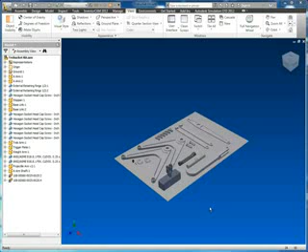What you see on the screen is my trusty trebuchet, which if you've seen some of my other demos is one of the models I use pretty consistently because it's simple, does a lot of things, and is fun to play with. As part of the demos and workshops I do with students around the country, I've got the assembly all set up where it's assembled, and another version laid out as a kit of parts. I also have one where the assembly is partly built, so depending on my time, I can adjust how long it'll take to finish this model.

So what we're going to go through today is considered a bottom-up approach to assembly modeling. The other option would be top-down. Bottom-up means essentially that you've built all the parts, and now you've got them complete and you're going to put them all together in an assembly. To be honest, typically I don't start this way unless I'm really trying to explain things to people.

I normally work with a top-down approach, where I build an assembly. I might build one or two parts on their own and then put them in the assembly and use them as the foundation. For example, in this model, I would have built this ground plane because it is the base that everything attaches to. From there, I would build parts in context of the assembly rather than building them separately and adding them in. But I'll show you how to do both a little bit, I'll touch on each of those, though I'm not going to go too deep into top-down modeling.

Anyway, to get started, what is assembly modeling? Assembly modeling is essentially putting together your assembly. What that means is, if you go to the View tab in Inventor, under the Visibility panel, there's a Degrees of Freedom button. That lets you see, or turns on the visibility of, the degrees of freedom. Every part has 6 degrees of freedom: an X, Y, and Z translation, and an X, Y, and Z rotation. In order to properly, fully constrain a 3D model, you have to provide 3 constraints to lock it into place.

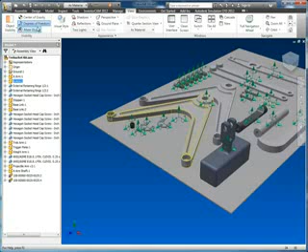So I'm going to start with this piece here, which is one of the A-arm components, and I'm going to turn off the degrees of freedom. You can toggle it on and off. I'll be toggling it back and forth throughout the demonstration until everybody gets a feel for what it's doing, and then I'll stop using it.

If you go back to the Assemble tab in Inventor, in the Position panel, there are 2 things that are important when you're talking about assembly constraints: the constraint dialog box, and the assemble command. I typically teach students to start with the constraint dialog. It's considered the old-fashioned way, it's been in Inventor forever. It was the way you did assembly constraints up until around 2011 or 2012. I can't remember exactly when they added the assemble command, but within the last couple of releases they added it, and I'll touch on that in a bit.

The reason I have people start with the place constraint dialog box is it's good information. It shows the icons, you can hover over them and see that this is the mate, hover over this and see that it's angle. It's important to understand what these icons look like, what they mean and represent, and understand the solution options before you start using the assemble command. The assemble command is more for somebody with a bit more experience, but once you get that experience using the constraint dialog, the assemble command is really nice.

It speeds things up and makes it a lot easier to assemble things. So anyway, back to getting started.

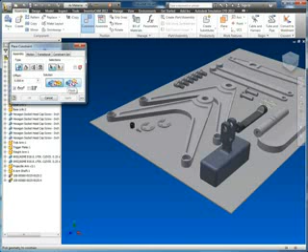In Inventor we don't technically have a separate mate and flush constraint. I mean, technically we do, but essentially they're just opposites of each other. A mate puts two faces together, and a flush aligns two faces in a flat orientation. I'll show you this in a second as we do it.

Let's go ahead and start out. I'm going to zoom in so I can easily select this face. What I'm going to do is select this face, then zoom out and select the side of this plate. Actually, I'm going to turn on my edges to make it a little more clear. There we go.

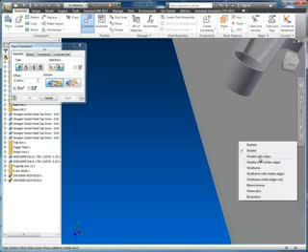Here you can see what I did: I selected two faces, and in the dialog box these little glasses are a preview, so it'll show you what's going to happen. You can see I've got OK, Cancel, and Apply All available. If I hit cancel, the part flips back into its original position and everything's canceled, or I can apply it and move on to start adding new constraints.

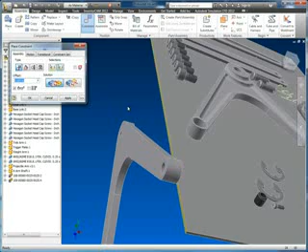Before I move forward, let me explain what happened. I selected the two faces, this face here and the side of the ground plane, and mated them. That's what this solution is - if you hover over it, it says mate. The other option is flush, which essentially flips that over. It's just a matter of flipping the answer, so they're very similar constraints, and that's why we only have one called mate, with solutions of mate or flush.

So what I did is a flush, and I'm using this as a temporary kind of constraint just to start getting this main piece put onto this plate the way I want it. Then I'm going to ground it and build from there - I'll explain as I go along. So I'm going to go ahead and hit apply.

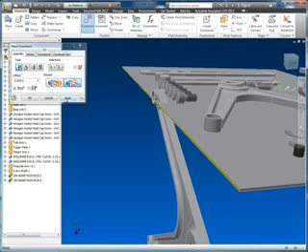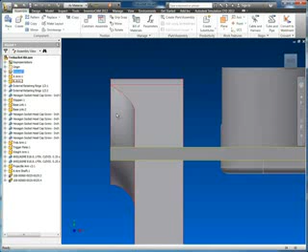Actually, I'm going to hit cancel so I can show you what just happened. If I go to a front view, let me get out of perspective view so you can see what that looks like. You can see here that these two faces are now aligned. If I zoom in, here's the ground plane and here's the A arm, and you can see they're flush on that face.

The way to test it is I can click and drag any part in Inventor to see what degrees of freedom it has remaining. If you'll notice, if I drag up and down, it slides. If I drag right and left, it does not move. It still moves up and down just because my cursor is moving, but it maintains that flush relationship.

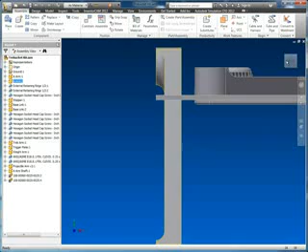Now that I've got that in place, let's rotate around here. Next, I'm going to move this up a little bit. So I'm just showing you that even though I'm moving it around, it's still aligned flush to that edge.

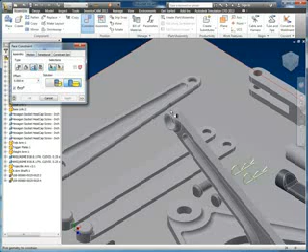Now what I'm going to do is bring my constraint dialog back up, and I'm going to use this tangent option. This is an option you probably won't use very often, but it just so happens I need it in this case. I'm going to select a circular edge and then the top of that flat plate. I'm going to zoom out, and you'll see here that it has made that tangent to the edge.

Again, this has another option where you can flip inside or outside of the surface. This is common across most of these tools, so you might have a couple different solution options. It doesn't hurt to switch back and forth between these just to get a feel for how things work.

I'm going to hit OK, and now I'll show you what I did. See, now it's maintaining that tangent if I click and drag, so I can rotate this up to be something like this. Of course, this edge, this face, is going to be tangent to the top of the plate. So that's what we're going to do next.

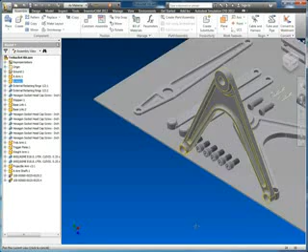But now what you can see is if you look at it from the left, even if I'm dragging this and trying to move it up, it locks that into position, and it's kind of floating in space. But that's what we want it to do.

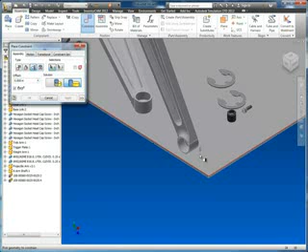So I'm going to go back to my isometric view and add that final constraint here. I'll bring my constraint back up, go to my tangent option, and select the circular face and the top of the plate.

And so now I can slide this back and forth. I can't lift it off the plate because it's maintaining those tangent constraints. And because we have the flush constraint, it's lined up with the side of the model.

What I'm going to do now is I don't really want this part right up against the edge. The only reason I put it there was just to explain things and as a temporary orientation for this.

What you'll notice is if I select this part, it highlights in the browser. Here's my A-arm in the browser. Now this is a simple model, so I only have maybe 20 parts or so. But if you've got 100,000 parts or 50,000 parts in an assembly, this arm may end up dropping off the bottom of the screen and you might not be able to find it.

If that happens, you can always right-click on a part and say Find in Browser. Let me pick this projectile just so something else is selected. If I hover over it, it highlights, but if I right-click and select Find in Browser, I have to select it first. There we go - hit Find in Browser and it will find it. It's a bad example because of the size of this assembly, but the key is it'll scroll the browser to that location and highlight the part for you.

You can also do it in reverse. If you don't know where the part is in the assembly but you need to find it, you can right-click and say Find in Window, and it will highlight the part and zoom in on it in the window. It's just a tip that comes in very handy when you're working with larger assemblies.

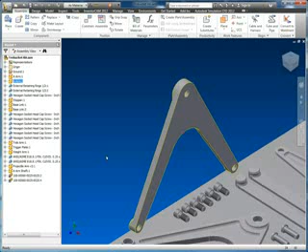So next, what I'm going to do is suppress this flush constraint because I don't really need it - I just needed it temporarily to align things. I could delete it, but just in case I want to turn it back on, you have the ability to suppress it. You'll notice it grays out in the browser, meaning this constraint is turned off.

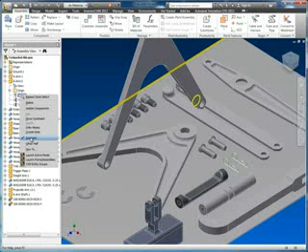So I can now move this model out into the center of this part, where I think I'm going to want to build from. If I ever want to go back and put that back on, I can right-click on that constraint and hit unsuppress, and you'll notice it snaps back into place. So it's just turning the constraints on and off.

Now that I have this part in position to start building the rest of the model, I'm going to ground it. I select the part, right click, and select Grounded. You'll notice a pin icon next to the part in the browser, and if you click and drag, you get a pin icon indicating it won't move. Just like any part, you can unground it again, so from time to time you'll ground and unground things to help with the assembly process.

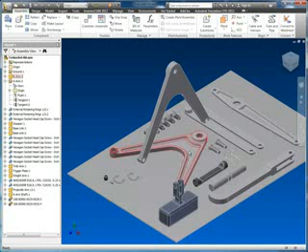Next, I want to do a couple things to prep for later. I'm going to delete this part. Let me select it properly... there we go. And I'm going to delete a few of these screws, just so I can show you something in a little bit here as we go along.

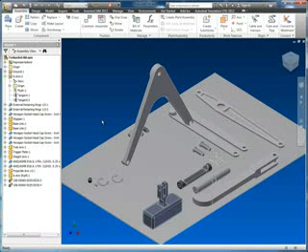Right now you're seeing all these parts already in the assembly. In a typical environment where you're not starting with all the parts in a file already, you would use the Place button in the upper left-hand corner to select a file from your hard drive.

And you know what, let me see, this is the weight arm, I'm going to go ahead and delete that as well. I'll go back and show you how to place parts in a few different ways as we move along. But first, just to clean things up and get started, let's look at putting this shaft into position up here.

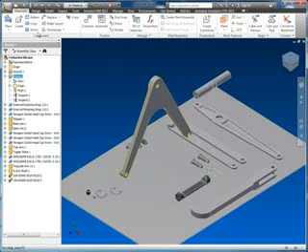This part is still grounded, so I'm going to bring up my constraint dialog box. I'm already on the Mate command, so I'll select the bottom face, or the face on the end, of this part and the face of that part, and I want them mated rather than flush. I hit Apply, and you'll see it locks that thing into position. Now I can click and drag, but it maintains that mate constraint, keeping it in position.

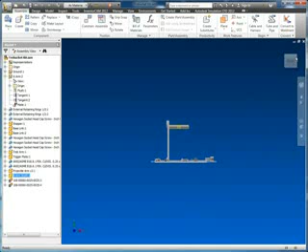Essentially, all we're doing is working through a process of removing degrees of freedom. Remember, on the View tab there's a Degrees of Freedom option, and you'll notice this part no longer has the ability to move in one direction, it lost an arrow. I think it's the X direction, yeah, in the X direction it no longer has an arrow.

As I go back to Assemble and add a constraint, you'll see these change as we go. So I'm going to do Mate again, but instead of a face, I'm going to select the axis. If I hover over this, it picks up the axis by default. If I hold my cursor in one place, I get the Select Other dialog, which gives me the option to select the axis or the face.

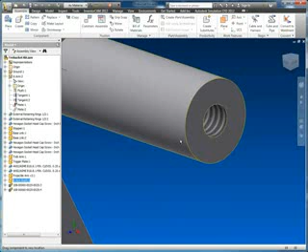This will come in handy, I'll show it more a little later. If you don't want to wait for it, you can right click and choose Select Other to bring that dialog up immediately. I'm going to select the axis because I want to align that axis with the axis in this hole. By doing that, I lock it into position, and you'll notice the degrees of freedom change. Now the only thing it can do is rotate, which is hard to see, but if I rotate it you can see the threads in that hole spinning a little. Essentially it's locked into place on the axis and on this face, so it can spin, and I'll just leave it like that for now since it doesn't really matter in this case. But I'm going to turn off those degrees of freedom again.

Next, we need to put another arm on this side of the model. I deleted the one that was in this assembly because I wanted to show you that it's essentially just the same part flipped over on the other side. Once you have parts in the assembly, I select this part, and here it is in the browser. Rather than going back to the Place button and browsing to my hard drive to select that part, I can actually drag and drop it right from the browser.

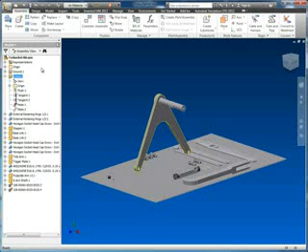If I left click and drag, you'll see I get the little place symbol. When I release, it puts a copy of that into the assembly, and you can see that down here. Now ARM 3 is down here on the bottom. You can reorder things if you need to, just to keep your similar parts in proper orientation with each other in the browser.

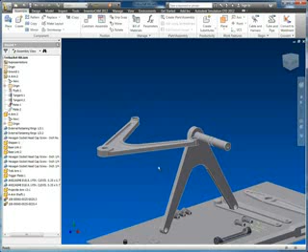Now I'm ready to start adding constraints to that part, so I'm going to bring up my constraint dialog box. I'm going to use select other. What select other does, and I'll explain more as we go, is it takes an arrow and shoots it straight through the part.

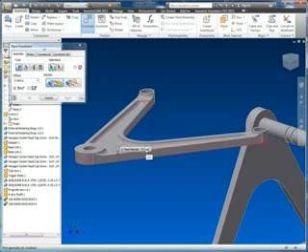So here I'm selecting the top face. The only other face I could select, going straight through the part to the back of the screen, would be the back face. So if I right click and hit select other - whoops, I'm in a bad place, there we go - it automatically picks the bottom face for me without having to rotate. That'll come in more handy with some of these other parts, but it means you don't have to rotate the model all over to get to a face you can't see.

Next, I'm going to select the side face of this part, hit apply, and now my part snaps into place. Again, I can test by clicking and dragging just to make sure it's working and reacting the way you'd expect.

As you get the hang of constraints, next I'm going to do a mate. I'm going to select the axis for that hole and the axis for this hole, and apply it. Then I'm going to select the axis of this hole and the axis of this hole, and apply it.

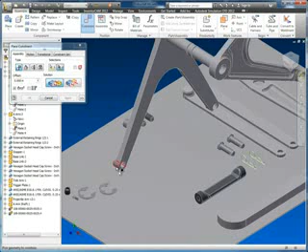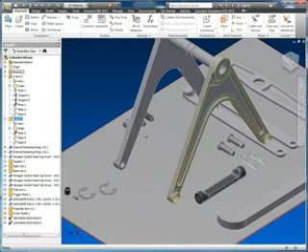Now what I've done is locked this into place, and when I click and drag, you'll notice I get a no-go symbol, like no movement - different from the grounded one. Over here, if I click this and ground it, I get the pin with the ground symbol. This one is locked into place and cannot move because it's specifically grounded and pinned into place. This one, the no-go symbol, shows that it's not grounded, but it has enough constraints that it's positioned 100% and can't move without other parts moving with it or causing it to move. So really this is just a process of rinse and repeat now.

Let's get down here to put these pieces on. These are the braces that run between these two holes on the inside, and it has a little boss on the end so these screws can screw into it a little easier.

So here's a good example of when you can use select other. I want to get to the bottom face of this, not the top face, but its opposite underneath this part. But I don't want to move it or rotate it - this is where you could use select other.

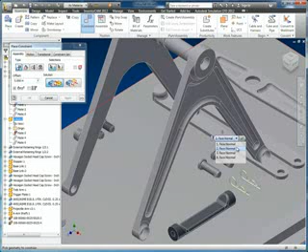So I'm going to right click and hit select other. First you want to make sure you hover over the face that you think you can get to the bottom face through, and let it bring up the dialog box. Now if I click the drop down, you'll see there are 4 faces I could pick: the top of this face, the top of the ground, the bottom of this face, and the bottom of the ground. You'll notice it highlights that face up here, though it's a little hard to see - let me reposition this so you can see it more clearly.

Select other - so I've got the bottom face there: top face of this part, bottom face, top face of the ground plane, bottom face of the ground plane. So without rotating, I can get to any of those 4 locations.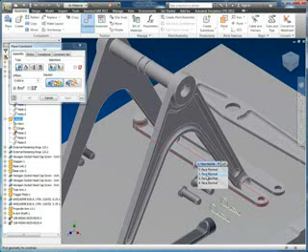So I'm going to pick the bottom of this part, and then link it up to the face on this part. When I do that, it snaps into position, and I can cancel and drag it around. So it's essentially doing what we've already been doing—we're just rinsing and repeating the process.

Next, this is something common across all of Inventor. If you right-click, the top of the right-click menu shows the last command you used, or you can just hit enter on your keyboard to bring up the last command. This comes in handy when you're using constraints because you keep going into this dialog box. But once we get into the assemble command, it'll be a lot different—you won't need the dialog box anymore.

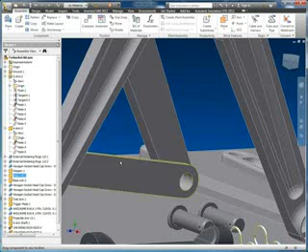So I'm going to select that axis and the axis of the hole I want it aligned with. Now, if I click and drag, you'll notice I can rotate this—just another way to test and make sure things are working as expected. I'm going to hit enter on my keyboard to bring the last command up, select this axis and the axis for this hole, and apply that. It locks into place.

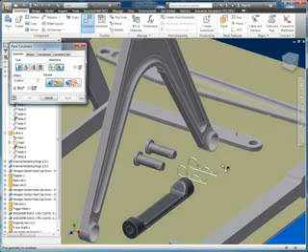Now, without even getting out of the dialog box, I'm going to start the same process again. Select other—I'm going to get the bottom face. I'll lock that face there and hit apply. Oh, I must have picked the wrong face. I think I picked the top face of the ground plane, which is grounded.

So that's actually not a bad thing. Let me go back and show you what just happened, because the last thing I want everybody to think is that errors are bad. They aren't—that was just a warning telling me I tried to do something the system couldn't do. If I try to take this top face of the ground plane and mate it to this part here, I'm going to get that error.

What it says is I can either edit the constraint and pick something different through the selection options, or I could cancel this. I could say, whoops, I know this was grounded—maybe I grounded it temporarily and didn't mean to, and I know that's what's causing the problem. I could just accept that constraint, put it on in a failed fashion, then go unground this plane, and it would snap into position like you put on a proper constraint.

And there's also a diagnose process you can go through to suppress constraints and walk through a process to try to fix it. But in most cases, once you get the hang of it, you'll know what's going on.

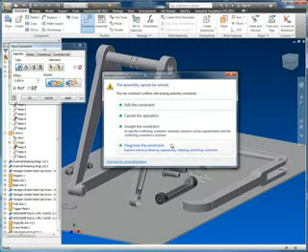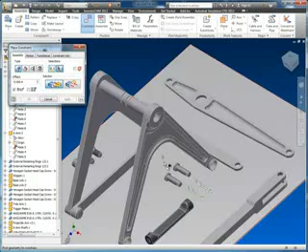So I'm going to go back and continue where I was. I'll select the bottom of that face and the back of this face, and apply that constraint. Then I'll zoom in a bit and get that axis and the axis of this hole, and apply that. Let me zoom out a bit.

You can see it's hanging down underneath, so I'm going to cancel this. You can click and drag and it rotates into place—though you don't have to do that. I'm just doing it for visibility purposes so you can see what's going on. So I'm going to hit enter on my keyboard and bring the constraint dialog box back up.

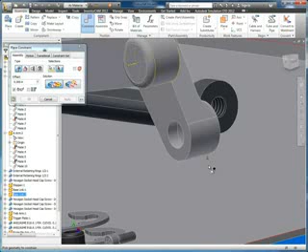I'm going to do that axis, and the axis to this hole. Now I'll go back and reselect the second selection. I could pick the center of this hole or the outer face - it's up to you. If you know this hole is always going to be concentric with this face, it doesn't matter which one you pick; it's a matter of preference. To be 100% safe, pick the center of the holes, since that's what you want lined up. But again, it's a matter of design intent. So I'm going to select the center of that hole and hit OK.

And now I have those parts locked into place. Let me zoom out a bit and reset everything back to where I was. Okay, so now I've got everything in position - the frame is starting to come together. Everything's locking into position because this is grounded and everything's constrained to it.

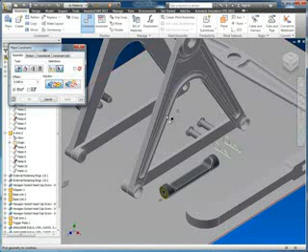Next, let's go ahead and put in this piece here. It works pretty much the same way with one slight difference. I'm going to select that face and apply. Now I'm going to select that axis and the axis for this hole and apply. The one thing you'll see here is this does rotate - so it does have a degree of freedom remaining.

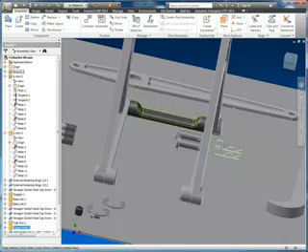Now it may or may not make sense to put a constraint on there to prevent that from rotating. I know when I assemble this, the pressure from these screws holding it together and the way this assembles means it's not going to rotate like this. So I'm going to add one more constraint to remove its final degree of freedom, and that's going to be an angle constraint. We haven't done this one yet, so I'll show it to you.

I'm going to select the angle constraint. It's pretty simple - I select the top face there and any other face I want it aligned with, and I want those to be in the same orientation with 0 degrees of angle between the two. I'll select the directed angle option, and I'm not going to get into these other options now - they get a little more advanced as you need them. Just remember, there are alternate solutions for all constraints, so if something's not working exactly right, look at these other solutions. The help file explains these, but I won't get into them now.

So let me show you here - if I hit 0 and hit apply, it's going to lock that into place. So this face and this face have 0 degrees of angle between them - they're parallel to each other.

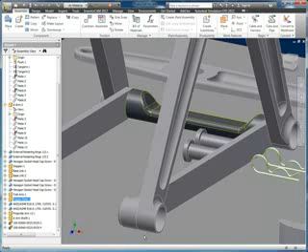Now if I select this and say find in browser, there it is - the trigger plate. What you'll notice is that as I've been adding these constraints, it's been adding them underneath each of the parts. This has another face - this is the face on the trigger plate. And you can also see when I highlighted this, it's showing me the other face that's involved.

But I don't know exactly what part that is - I can hover over it and see it's the base link. But I could also right click on it and say find other half - here it is, called other half. It will jump to that part, expand it, and highlight the other half of that constraint. This comes in handy for finding constraints and troubleshooting if things aren't assembling properly and you have to figure out what's going on.

The other thing you'll notice is this angle. The reason I wanted to show you more about the angle is it shows you the degrees in the dialog box. If I right click on this and hit edit, you'll see this degree. If I type 45 and hit OK, now you'll notice this face and this face are 45 degrees apart - it's just controlling the angle.

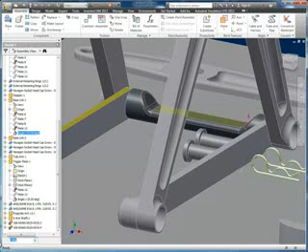The same goes for mates in any of our other constraints. I'll show you that in a better example in a little bit. But one shortcut: if I select this angle, you'll notice down at the bottom of the browser there's a quick input area where I can say, well, let's see what 70 degrees looks like. When I change it, you'll notice it changes to 70 degrees. So I'm going to set that back to 0 by typing 0 and hitting enter on the keyboard. It resets it.

That actually controls drive constraints, which I'm not going to get into here. But since we're in assemblies and I've got a couple parts that are easy to work with, I'm going to do a quick side tangent on drive constraints because it's important to know, and it comes in very handy for showing motion and examples to people who need to see your models.

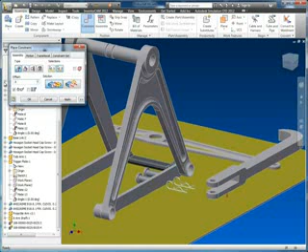I'm going to really quickly set up a drive constraint, and it's nothing special. It's just a constraint, and you're changing the distance of the offset in an animated fashion. For example, I'll take this part, bring up my constraint, and make the face of this arm mate to the top of the ground plane, then apply it. Notice there's 0 offset. If I set this to 1 inch, you can see it changes. Here's 0.5, and then let's go back to 0. So all I'm doing is creating a mate constraint.

Now let me find that in the browser. I have the projectile arm, and here's my mate. On any constraint that has an offset like that, you can right click on it and select to drive that constraint. Let me bring the dialog box in here. So this is going to say start at 0 inches, which is where it's at now. This constraint is 0 inches off. It has no offset at all.

And then I'm going to say make it, let's do 3 inches. I'm going to do between 0 offset and 3 inches of offset with no delay. This little double arrow is just more options you can run. One option is just go from the start position to the end position, that's it. The other option under repetitions is start, end, start - so go from start to end and back to start once. In this case, I'm going to do it 3 times. The other options here are the amount of steps, so if you did it in 1 inch increments for 3 inches, this would make 3 steps to get there.

I'm actually going to do it in, let's do 0.1 inch steps. You could also choose to do it in the number of steps, say 30 steps, and you'll have to play with these just to see. But I'm going to go back to 0.1 and just hit play, and all it's doing is changing that offset value for me. Actually, you know what, I'm going to go to 0.05 instead and play that again. So by doing smaller increments, it does slower motion.

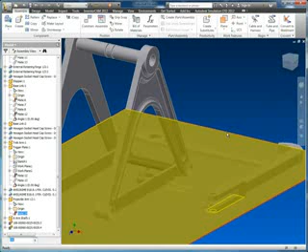So if I hit OK here, well, let me go a little bit... there. Okay, so what I did is I stopped it at about 1.6 inches - exactly 1.6 inches. If I hit OK, it put the offset value in for 1.6, just like I went and typed it here. So it's just a way you could do some testing, find a value that worked, and apply it quickly to your model. Or if you decide you don't want it anymore, you just go back and hit 0, and you're back to where you started with no harm, no foul.

So I'm going to go ahead and delete that constraint. Sorry for the little side run there and the tangent I got off on drive constraints, but they come in very handy. Actually, you know what, let me undo that.

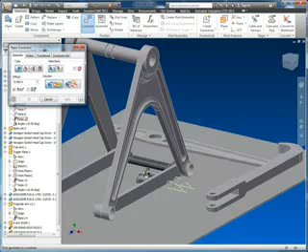The other important thing to remember here is that if other parts are constrained to that arm, so for example, let me pick the top face of this bolt or this clevis pin. If I were to mate this to the arm here and apply that, now if I do the drive constraint, it keeps those constraints, right?

I'm going to drive this mate again, and both parts move. So it does maintain these relationships between those parts, even if you're driving constraints, which makes it so that you can do all kinds of motion testing and things like that. So anyway, I'm going to undo, put those parts all back to where they were, and we'll continue with our example.

Next, what I want to do is put this arm here into the center here. Now, there's a couple of things that are going to happen here, so that we can talk about. I'm going to select this part in the browser or in the graphics window, and it highlights in the browser. If I expand this, you've got to remember back to the part modeling examples.

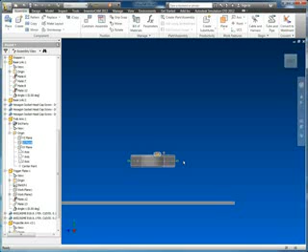Every part has X, Y, and Z planes and axes. When I created this part, I used a symmetric extrude, so I know that the XZ plane here runs right through the middle of this part. And if I zoom in, you can see it extruded a 1/4 inch, or an 1/8 inch in one direction and 1/8 inch in another direction. So I know that this part is exactly centered on that XZ plane.

Now this is important, it comes in handy. It's again a tip and trick that is useful to know. If you have something like this selected in the browser and you start the command, you'll notice that selection 1 has already been made and it's asking you for selection 2. So that's good to know, that it's bidirectional, and it allows you to pre-select things just to make it a little bit easier. Once you get the hang of it, it really speeds things up.

But the other thing that we need here is this part here. We find it in the browser, there it is. The A-arm shaft also has origin planes, but in this case I did not use a symmetric extrude. So what I need to do is add a plane right in the center of this part that's always going to remain in the center of this part.

So what I'm going to do is, this is where we get into a little bit of top-down assembly modeling, where I already have an assembly and I can go make changes to the model as part of a way to assemble things. So I'm just going to double-click this part. Now, one of the things you can do is say, here's mid-plane between two planes, I could select this specifically. There's a bunch of different options for creating work planes that you can do.

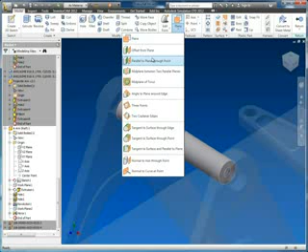I almost never use this drop-down list. It's good when you're learning, in the beginning, to understand what options are available. But once you have a feel for what they do, you can just click this plane button. And I know that once I select this face, I have the ability to select another face. And I know just from practice and trying things out that when I select this other face, it's going to create a plane right in the middle.

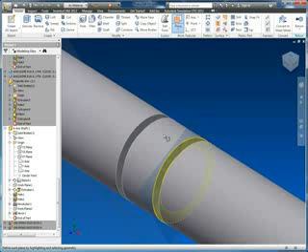And it shows you the preview for it. It's hard to see here, but you can see when I move away, I'm getting the plane on this face that I'm selecting, and it's showing me the plane that's going to be created right here in the middle. So when I select that, I get a plane right in the middle. If these planes move apart, this will always be centered between these two. So that comes in handy when we're starting to do some modeling.

And I can go back to my assembly with the return button in the upper corner, and I'm back in the assembly right where I was, but now I have a work plane that I can use for mating these two parts together.

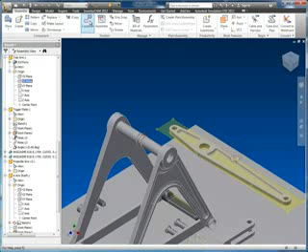So let me go find this in the browser again. There we go, and here's my XZ plane. I'm going to select that, and then hit constrain. My first selection's already been made, and I'm going to select this work plane that we just created.

Now, one thing I kind of screwed up there, which is not the end of the world. You're going to run into places where you maybe clicked apply too quickly. You can always go back to the browser and right click on a constraint and hit edit.

One thing is I don't like this flat plane on this side. I want it flipped over, so I really wanted the flush constraint, not the mate. I'm going to hit the flush solution and hit OK. All I did was flip that part over just so I can see these indentions and things like that. It's more for aesthetics than anything.

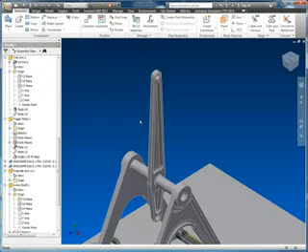Now I'm going to hit enter on my keyboard and get back into the constraint dialog box. I'm going to select this axis and the axis of the part, or the shaft. When I hit OK, it locks it into place, and you can see that it can rotate now. So what I'm doing is I'm just starting to assemble it, just like you would get a kit of parts and start putting things together. It works the same way here.

Now what I want to do is show you a little bit more about the assemble constraint. You've kind of seen all this dialog box stuff and mates and flushes and offsets. The assemble command does something a little bit different. Let me get in and I'll show you.

It brings up a heads up display. Here's your offset, same thing you had in the dialog box before. It has a drop down here where you could select mate, mate flush, and these are the different solutions for mate. Here's an angle directed, here's tangent, outside and inside. So these are those solutions that you can have for those.

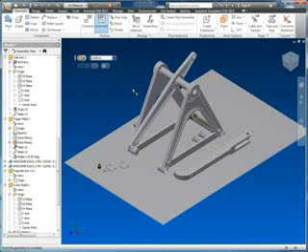What it does is, let's zoom in a little bit and start with this face. When you select a face, it starts looking for things you can solve to, things you can mate to. So what I'm going to do here is rotate around, and I think this is the right way. I'm going to select this face. Yep, that's right.

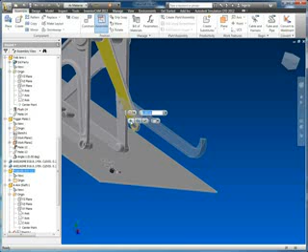Okay, and now what it does is it brings up the plus symbol, the undo, and the accept option, or OK. I'm going to temporarily apply this. The plus symbol says, yep, I like that constraint, go ahead and apply it temporarily. If I were to hit escape, everything would just cancel and go back to where it was.

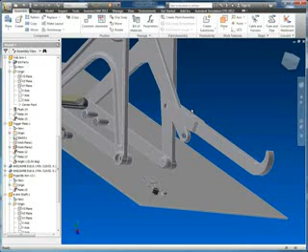What it's letting me do is, rather than keep hitting apply and launching the dialog box, it's letting me... whoops, well here, I'll show you what escape does because I picked the wrong thing. Oh no, it let me drop out, okay. Let me hit escape and get back. What it did was apply — I hit the wrong button there and it applied that constraint, but it has not applied the axis constraint that I was getting ready to apply.

So let me hit enter again, get back into my assemble command. I'm going to right click and hit select other. I want this axis. And now it's going to start looking for points or axes or things that I can mate to, and I'm going to select that.

Let me do the center of that hole. Now you'll notice I can actually select — it doesn't select anything on the part that I have chosen to start with. So it's really like selecting through that part into that hole. I'm going to select that and hit apply, and now you'll see these two things are locked together.

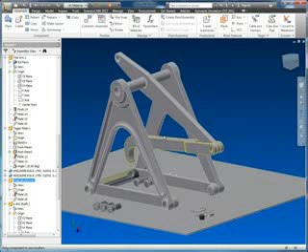And I can start to position it in a way that would make sense. If you've seen my other assembly or dynamic simulations, you'll see that this arm is supposed to be flipped under because we're going to put the weight up here and it's going to throw a projectile.

So now that we've got that arm into place, I'm going to show you the assemble command in a minute, but one of the things I did was I deleted the weight that hangs on this end piece. So I'm going to show you the place constraint or the place dialog just so you can see the process, but it's pretty simple.

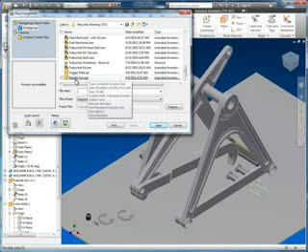I'm going to scroll down through my list of parts and find my weight arm, and I'm going to select that. It just asks me where I want to place it. I can place it anywhere, and once I've placed it, if I want multiples, I could click it again and place another version of it. When you're done, just right click and hit done, or hit escape on your keyboard.

Now I placed two and I don't need them, so I'm going to select this one and right click and hit delete. So now I have the piece I need.

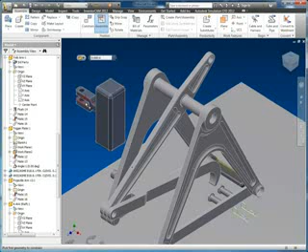Now I'm going to go back into the assemble command. I'm going to assemble this face to this face. I'm going to temporarily apply that, and it's upside down, which is no big deal. I'm going to select other, and get the axis for this weight, and select the axis for that hole. Now that I've got two applied, I'm going to hit OK.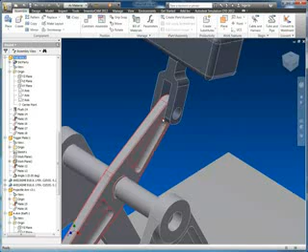Now I have the ability to—here's a place where occasionally you might want to ground things. When you start linking lots of parts together, things get a little out of whack if you're not careful. So you might select this part and ground it to give more predictable motion.

So I know that I can flip this around now. I can get this part and move it, and position it roughly where I want. And then I can always go back and unground that part. Right, so there's now motion between those.

Okay, so now what we'll do is we'll add a few more constraints just to finish this off. I'm going to use the assemble constraint quite a bit here, and I'll move along a little bit faster now. I'm going to hit assemble.

If you select the circular edge of a part, you get an arrow pointing down. That's the insert constraint, which we haven't talked about. What it does is it aligns a face and an axis at the same time. So it mounts the bottom face of this stopper to the top face of this part, and the axis of this hole to the axis of the threaded hole we just attached to. It's kind of a shortcut, and it comes in handy for putting nuts and bolts and screws together.

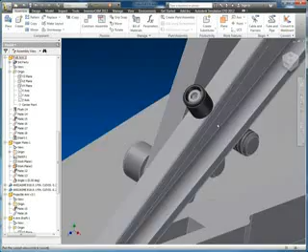Now I'm going to zoom in and pick this face to insert that into that hole. And again, let me rotate around. If I get the right angle here, I can see all these holes and all these screws.

So now I can do assemble, and I can do that face and that face. I'm going to hit enter on my keyboard to get back into it. That face and that face. I'm going to hit enter on my keyboard, and that face and that face. So now I've got all three of those parts.

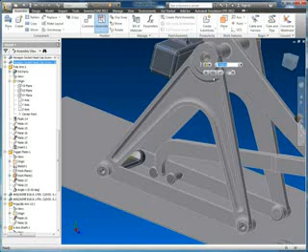So what I did was use the insert constraint, and now if I click and drag, you can see it spins, which is what it's supposed to do, but it can't come out of the hole.

Now those little icons that are coming up are called iMates. All our fasteners and things like that in our libraries have iMates. They're half of one constraint, and I'm not going to get into that here, but I could hold control down. If I zoom in, this is a mate, this is a mate, and this is an insert. So if I have this part just laying in an assembly, I could hold control down and drag it, and it would snap into position automatically. But again, I'm not going to get into that in this example.

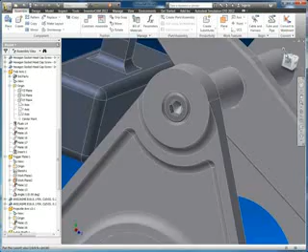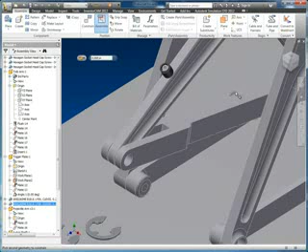All right, so real quick, now we're going to do assemble, and we will put that clevis pin into that hole, and we'll hit enter on our keyboard. While I'm moving this around, what I'm doing to reposition is just clicking my middle mouse button and panning. I can also scroll my middle mouse button to zoom while I'm in the middle of the command. It makes it a little easier to get around. So now I have those clevis pins in position.

Now I need these pins to hold those into place. So I'm going to hit enter on my keyboard to get the assemble constraint again, select other to get the axis, and rotate around here to put that through the axis of that hole. Now I'm going to temporarily apply that because I have one more constraint I want to do. I'll right-click and select other to get the axis for that hole, that rounded piece of the pin, and line it up with the pin itself. Now I can apply both constraints at once. You'll notice when I spin this, the pin spins with it because they're linked, like they're snapped together.

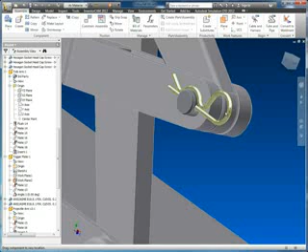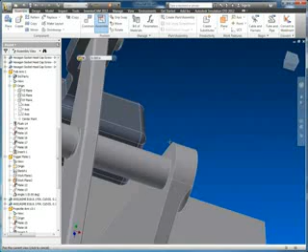Let's do the same thing on the other side. With this pin, I'm going to hit enter to get back into the command I was just using, select other and get the axis. Let me zoom out a bit. Oh, I forgot it's on the other side, so I'm going to rotate around — sorry for the quick motion there. I'll get that axis and temporarily apply it with the plus symbol. I'm going to select other to get the axis of that pin and snap it to the center of the clevis pin itself, then hit the checkbox to apply both constraints at once. Now when I click and drag, they all move as one big, huge system.

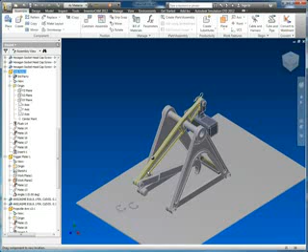Okay, last but not least, let's get back to those screws. I had deleted a few of the screws and wanted to get back to this shortcut. Once you've expanded all these parts, if you right-click on the top level assembly, you can choose to collapse all children, and it will quickly collapse everything. It just cleans it up a little bit so that I can find where these screws are.

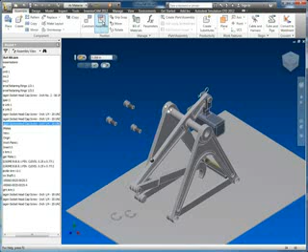I'm going to click and drag from the browser and put a couple more screws in here. I need 3 more screws to put into these holes. So I'm going to get into my assemble constraint, select the bottom of that screw, the bottom of the hole, and hit apply. Enter on my keyboard, center of that, to the bottom center of that hole, places that, and one more time enter on the keyboard to get back into the assemble command. I'll select the circle on the bottom of that hole and apply that. So now these are all locked into place too.

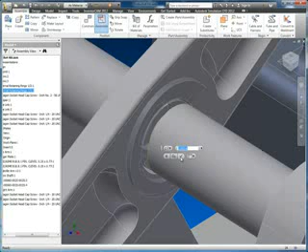Okay, last but not least, let's go ahead and throw these pins in, these little C-clips in. They fall into this hole. I'm going to temporarily apply that. I'm going to select the center of this, select the axis that goes through the center of that pin, and lock it there and hit apply. Whoops, helps if I hit the check button. There we go.

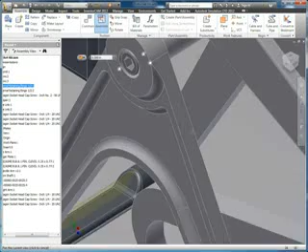Now I'm going to go back out and hit enter again, select this face, and rotate around to the other side. Well, I'm just going to use my view cube for that. Whoa, let's try that again. There we go, upper corner. I'm going to select the inside face there. Oh, let me zoom in. There we go, temporarily apply it with the plus. Then I'll select other to get the axis that runs through the center of this pin, and select the center of that, then hit the checkbox to apply. And now I have all my pieces locked into place.

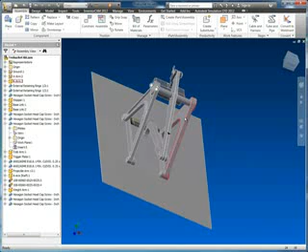So there you have it, a crash course in assembly modeling. Hopefully that helped everybody. Now that you have this assembled and working, if you haven't seen the dynamic simulation video, it'd be worth watching that now, because you can see, now that I've assembled it, what you can actually do with it, which is quite a lot actually. So look forward to speaking with everybody again in the future. Hopefully this was helpful. Thanks.